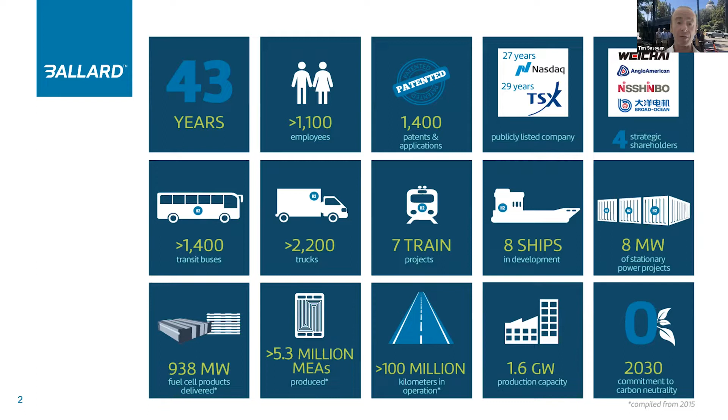The proton will migrate its way across the membrane, and the electron will go through your electrical circuit. They meet up on the other side with oxygen from the air, create water, and the whole process creates heat as well. We call that a unit cell. So you're creating heat and electricity from reacting hydrogen with oxygen and getting water as a byproduct.

There's what it looks like incarnated. At Ballard, we use carbon plates. Some people use metal plates, but they will look about the same. A plate on each side and a membrane in the middle. That membrane has the magic bits like the platinum catalyst, gas diffusion layers, seals, things like that.

That cell will make about 1 volt, and we'll stack those up to get the voltage we want, much the same way you would do with battery cells. You add up battery cells to get the voltage you want, and then you parallel those things to get the power you want. In the case of fuel cells, we parallel up fuel cell stacks.

We put them into a module. This is our FC Move module shown here. And in that module will be care and feeding of that stack, like the compressor to blow in and humidify that air and recirculate the hydrogen, and then monitoring and cooling as well. And that is the box we make, and that's the box that goes into your vehicle, in the engine bay, in the place where an engine would have gone.

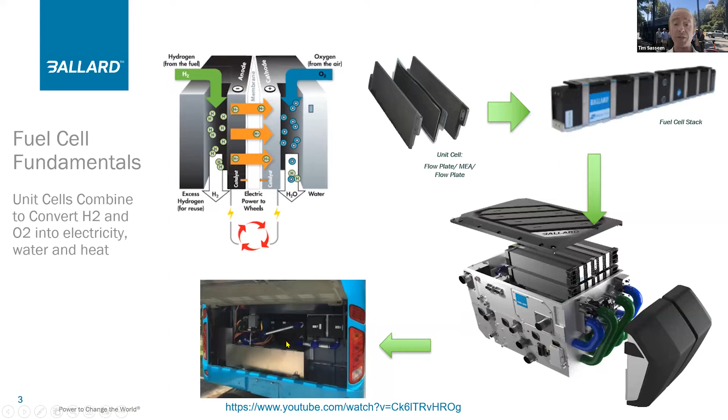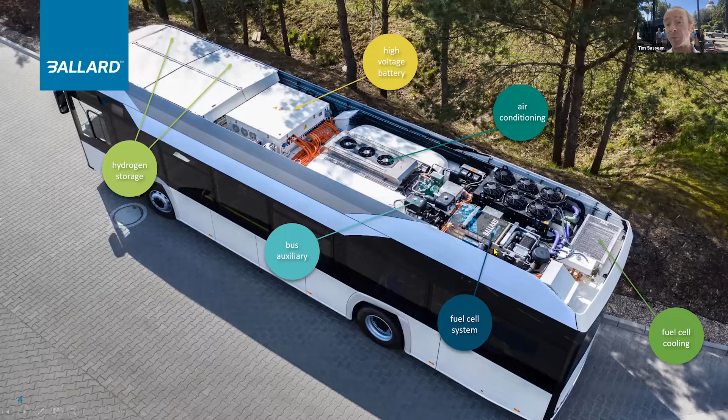This is an electric bus, but you take out most of the batteries and you put in a fuel cell and fuel storage.

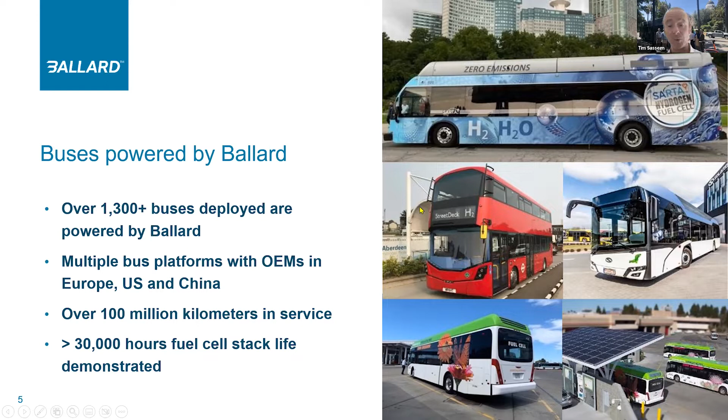We've got over 1,300 buses on the road now, powered by Ballard, and lots of miles and kilometers behind us. Buses with demonstrated over 30,000 hours of fuel cell stack life. And not just ours, some of the older buses that AC Transit has been running have gotten over 30,000 hours as well. It really shows that the technology is capable of lifetimes that are enjoyed by present combustion engines.

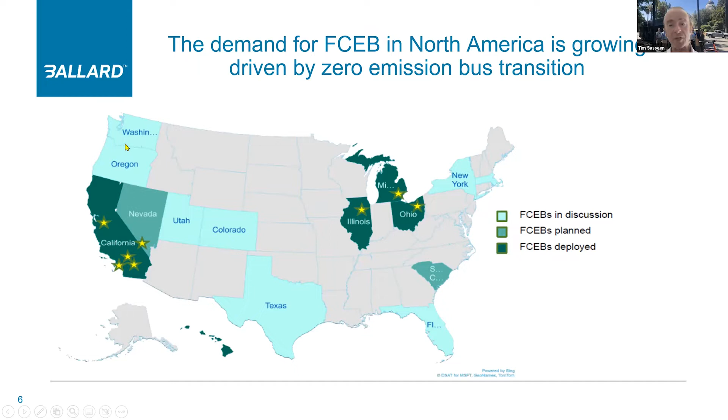Lots of interest in Florida and Texas, and also in Washington and Oregon. This is not a red state, blue state thing. This is really decarbonization, electrification across the US for whatever means is most appropriate for that region. And that's one of the magic qualities of hydrogen.

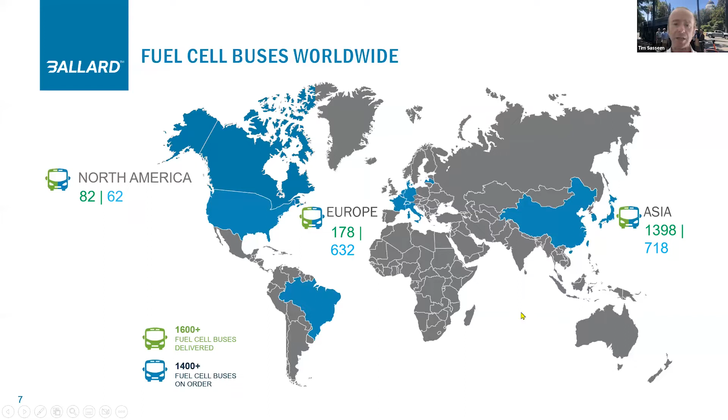And in Europe, we're exceeding this. We're probably over 200 now. I think we're just at 200. Big orders such as Birmingham with 100 buses, Cologne for over 100 buses, and then Asia, lots of activity over there as well. Costs have come down a lot.

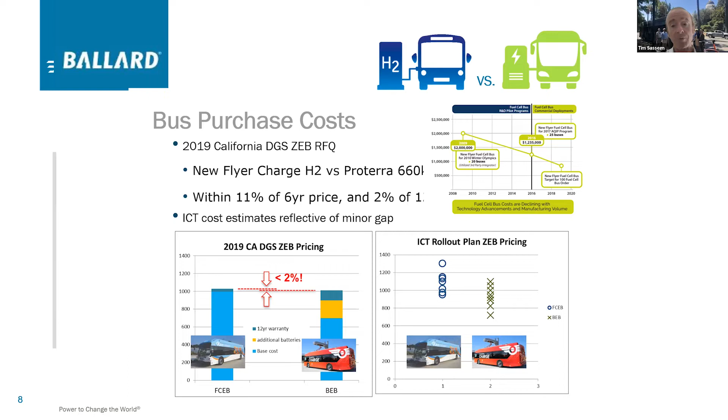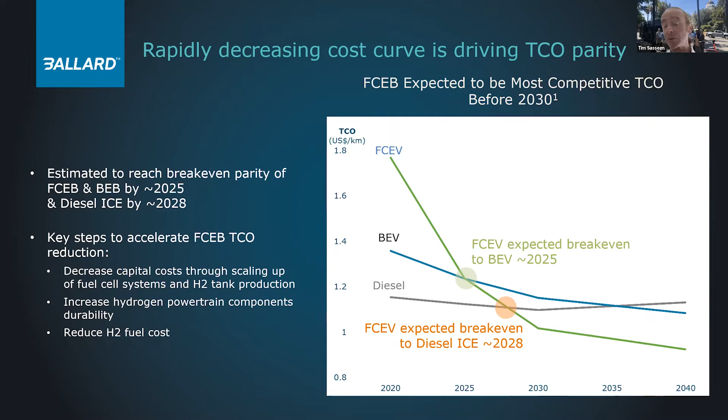We're anticipating 70% cost out of the fuel cell modules by the end of this decade, and we've got a lot of good reasons to believe in that. In fact, a lot of people are looking at total cost of ownership becoming superior for fuel cell electric vehicles over diesels even before the end of the decade. This is looking at studies from McKinsey and Deloitte and others. Mostly this is through the cheapness of the powertrain, which doesn't have that many components. Once it's in mass production, it should be quite cheap, and we're anticipating reduced fuel costs. Service costs have come way down as well.

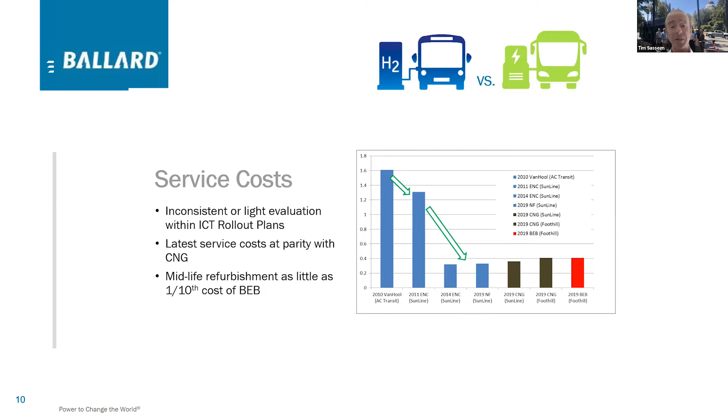There's some great reports to look at there. We're really showing comparable service costs to compressed natural gas buses, and that's with limited deployment and limited technicians out there. So we expect a lot of advancement there as well as we train more and more people to become proficient. This is from AC Transit's second study.

Check out their third study too, also very interesting. They have 5 buses of 5 different technologies that they're comparing, taking data on cost per mile. The fuel cell buses now, these are 5 New Flyers, have very comparable operating costs - in fact in some ways superior to what they're seeing with diesel and diesel hybrid, and close to what battery is seeing as well, with the advantage of very rapid fuel times. They're expanding their fueling facilities there and seeing these fills in under 10 minutes, well under 10 minutes, which is a huge operational advantage.

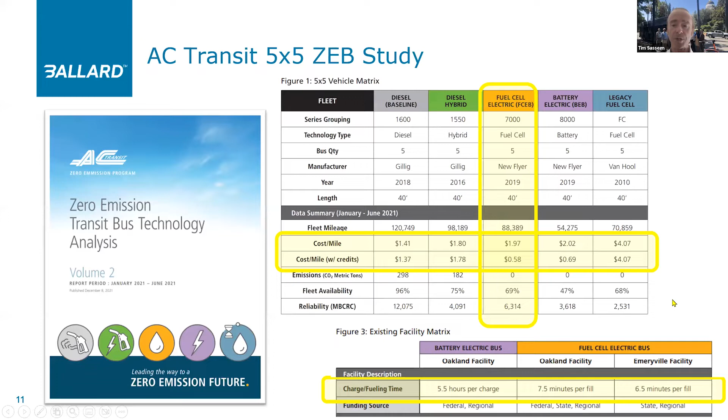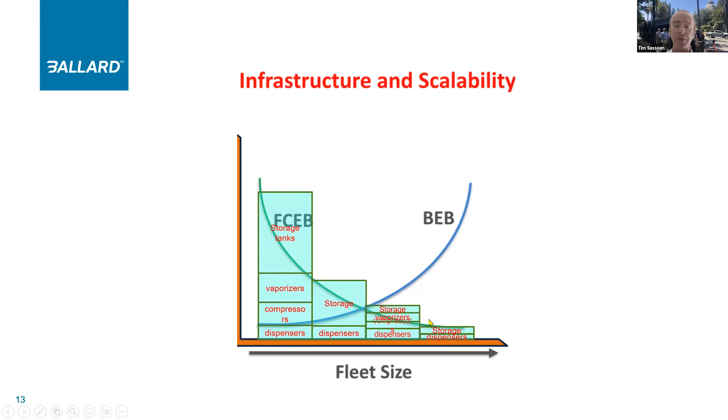We see as fleet size goes up for battery electric buses, you go more and more into your grid, into your public utilities infrastructure, and costs go to transformers, feeder upgrades, even substation upgrades as you get over 100 buses in a depot. On the fuel cell side, you actually have decreasing marginal costs as you add buses on. The components are quite oversized for small fleets, but as you get larger and larger fleets, you can add in buses for smaller and smaller costs. So as you have very large agencies, you'll see this curve really coming to fruition. We've had this notionally for a while, but from feasibility studies and recent installations, it really bears looking at.

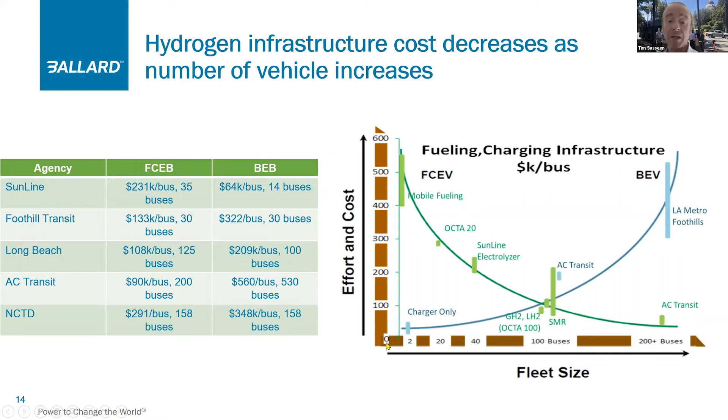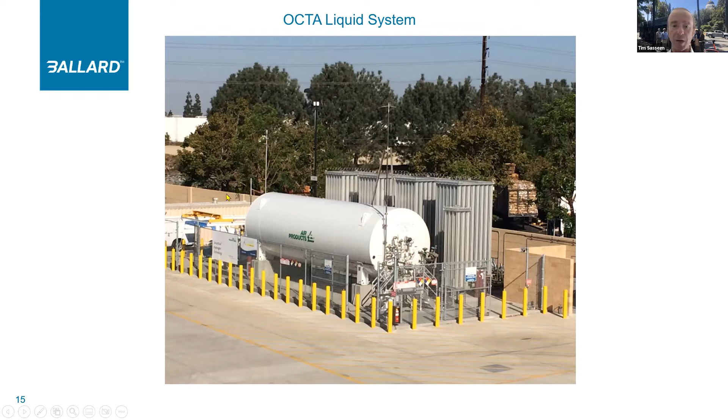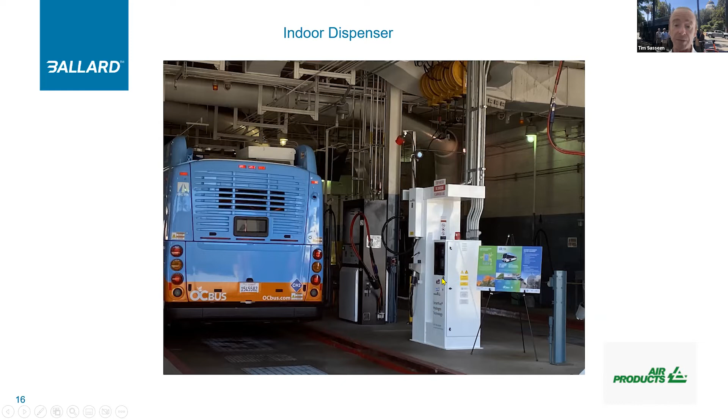Infrastructure costs are a major reason to look at hydrogen and fuel cells. This is what a liquid fueling station looks like, at Orange County. They have about, I want to say 4,500 kilograms of liquid hydrogen here, and these are vaporizers in back. This facility, all contained within the bollards you see here, is capable of fueling 50 buses. They have 10 buses on that right now. Dispensers are delightfully uninteresting - they look just like a fueling dispenser, and in fact you can put them right in line with the fueling that you do for diesel or for other buses. That's Orange County's setup.

Regarding safety, there's lots to talk about for safety with hydrogen - we could go on and on. Most people know that it's a flammable gas, but a lot of people don't think about the fact that we deal with flammable materials every day. In fact, one of them that we deal with almost every single day is gasoline. Gasoline is nasty stuff, and when you compare hydrogen to gasoline, you see some real advantages. Not only is hydrogen non-toxic, but it also is very buoyant and very diffuse. When it gets out, it can be contained in how it's released, as shown in the study done by Ford, comparing 2 cars that are intentionally given a fuel leak and an ignition source. The gasoline you see pooling on the floor, creating vapors, engulfing the vehicle in flames, whereas the hydrogen can be contained to a single release point and safely evacuated.

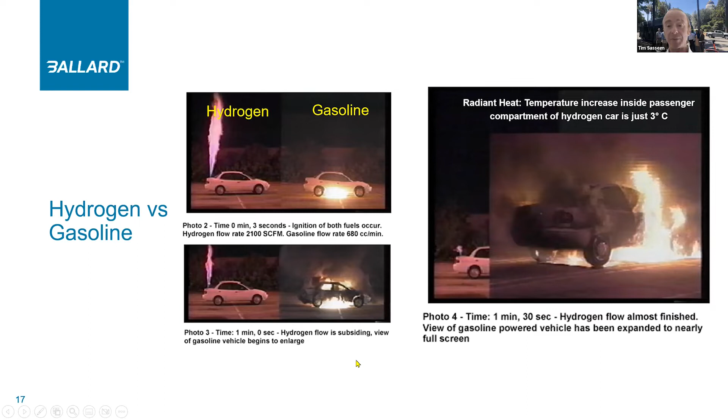Comparing it to gasoline and diesel, there's so many personal safety advantages, particularly regarding toxicity and ingestion. Next time you go to fuel your car, notice how much gasoline you're smelling. If you drive a truck or a diesel, you'll really be familiar with that - all these different criteria pollutants that come out that we're very familiar with. The thing you have to bear in mind with hydrogen is it's flammable, and you need to treat it like a flammable gas, the same as you would with compressed natural gas.

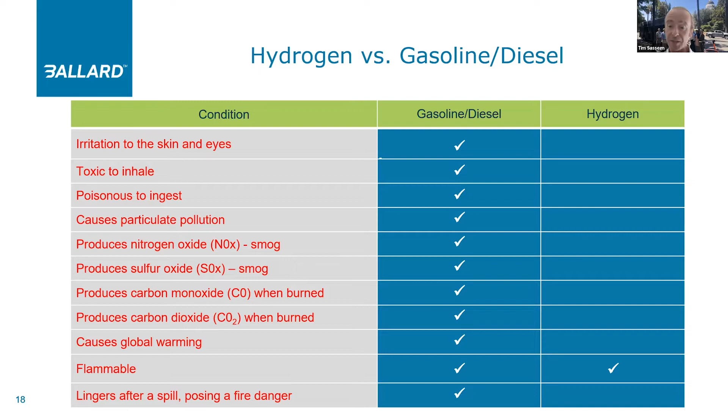And converting facilities, you do essentially the same thing. You make sure you have gas detection sensors, ventilation in the roof, and also explosion-proof electrical fixtures above the roof line.

One other thing worth mentioning is that with hydrogen and fuel cells, you separate out your energy storage into very strong tanks that are literally bulletproof, isolated from where energy is flowing and power is created. If you're going to have a problem, it's going to be where the power conversion happens. With batteries, which we use in our buses too, you pack both energy storage and energy conversion into one spot. That's what battery manufacturers struggle with as they densify this technology. It's a challenge.

Did I get muted? Hopefully I've been talking for the last 15 minutes.

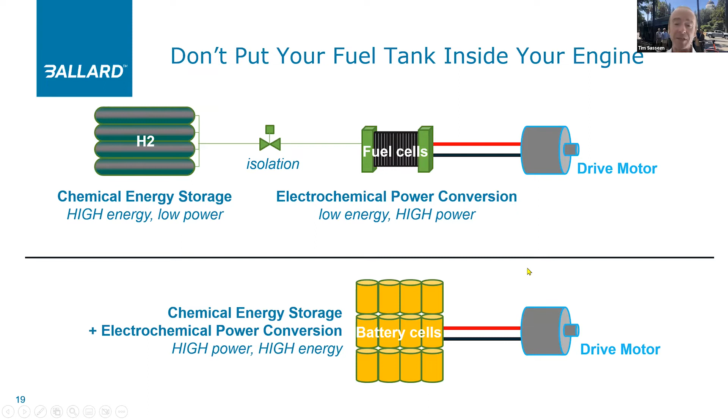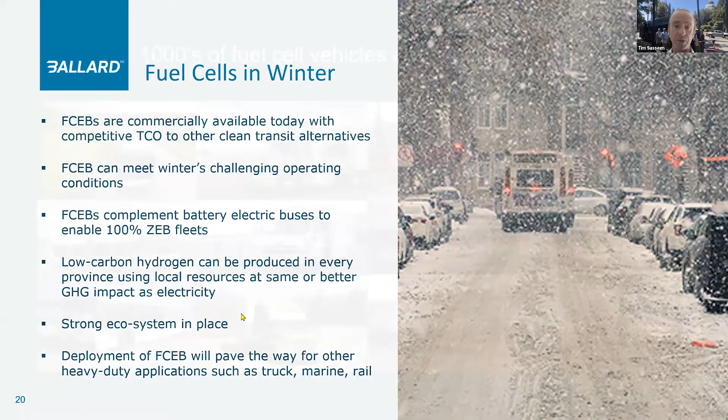Anyways, one advantage you'll see with hydrogen and fuel cells is that separation of energy from power conversion. In winter, it's true that we're around 50 to 60% efficient, but that is also heat that's used to heat the passenger compartment. Not only do we have extra energy on board, but also that heat used for combined heat and power for colder fleets. We haven't seen that so much in California, but certainly in Michigan and Ohio, and in our colder deployments in Europe as well.

We're beyond buses, we're in trucks and trains and rail trucks. We've got a whole bunch of urban delivery trucks. We've done 2 years at the Port of Long Beach with Class 8. We've got a giant mining truck now getting deployed in South Africa. Lots of interest from the mining industry. We've got a couple of yard trucks, these yard dogs, out at the Port of LA at TraPac, and 4 UPS trucks coming to West Sacramento soon. Some very big Class 8 trucks up in Alberta.

Lots of activity in trucks. We're doing yard trucks, Class 6 trucks with Hexagon Purus, as well as Class 8. Huge amounts of activity in trucks. Again, the same story - we're seeing the technology have the capability of beating not only battery, but also diesel technology in the very near future.

Trains, we have a train operating in China. We've got some getting on the rails in Europe and UK. We've got a project with CP Rail, and it's gotten a lot of attention up in Canada. We have a switching locomotive we're working on in California with Sierra Northern Railway. There are people working on a very interesting commuter train in San Bernardino. I'm sure we'll hear about that today. That's very exciting - Stadler's providing the train for that.

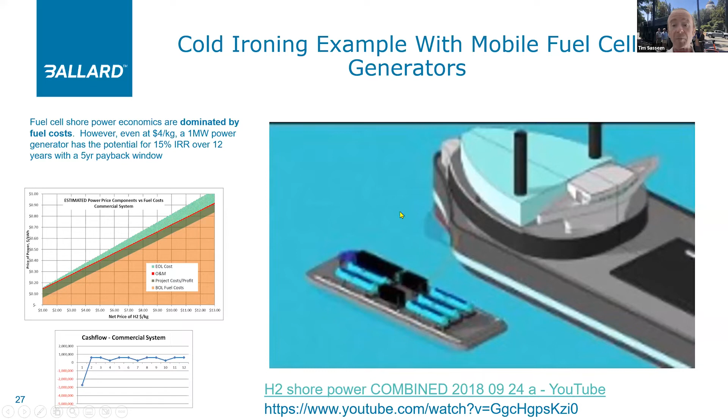Lots of interest in trains, lots of questions around fuel, which is common to marine. You have a lot of fuel to hold on board. People are looking at liquid or ammonia or methanol. Watch that sector, lots of activity there. We're involved in about 6 projects in Europe and a large tugboat design study here in California. And we're looking at cold ironing - applications of stationary power, such as providing stationary power for ships at dock, is one of the areas that's already economically viable. I got a cool video here, but I'm taking up too much time, so I'll keep moving forward.

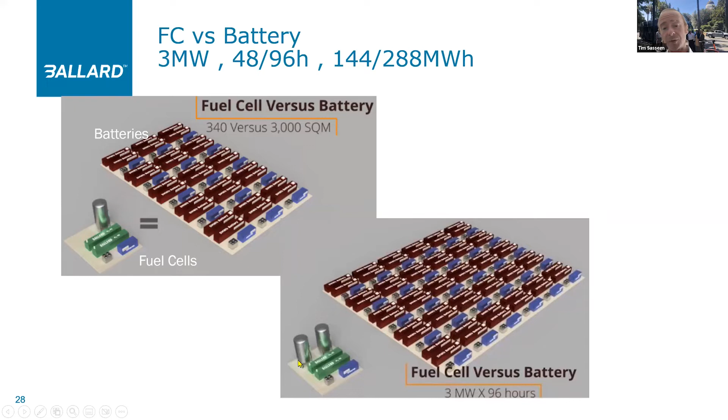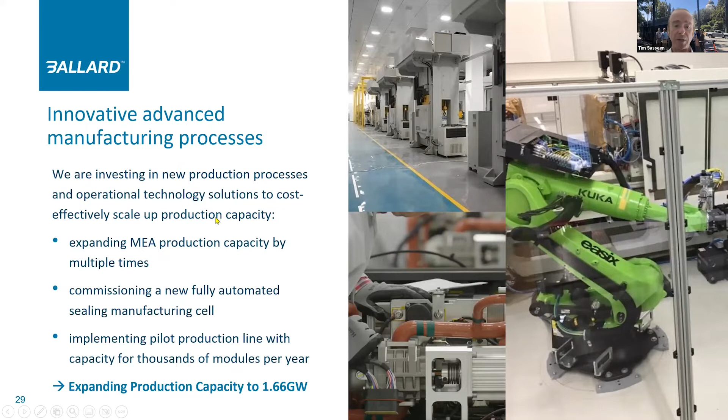Stationary power - this is looking at the comparison of fuel cell power versus battery power for a data center, for either 2 or 4 days, or 2 to 4 days. As you double the amount of time you need, for fuel cells you add an extra tank, whereas with batteries you add a lot of real estate. We're bringing our cost out from advanced manufacturing, a lot of what batteries have already done with continuous manufacturing. This is going to expand our production capability and drop our costs massively.

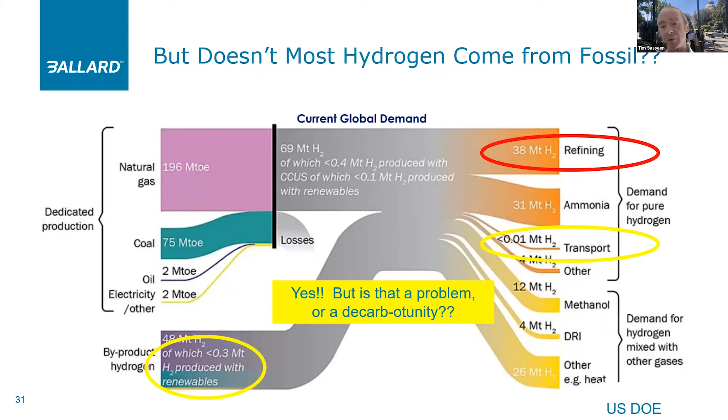When we talk about the fuel itself, you'll hear more about this later - you can choose between gas and liquid. One thing to bear in mind that critics of hydrogen say is that most hydrogen is produced from natural gas and fossil sources. That's true, but most of it is not used for transportation - only a very small amount is. More than that is made by zero emission hydrogen. Most of it's used for refining. So this actually is an opportunity, which hopefully will get hydrogen hub activities in.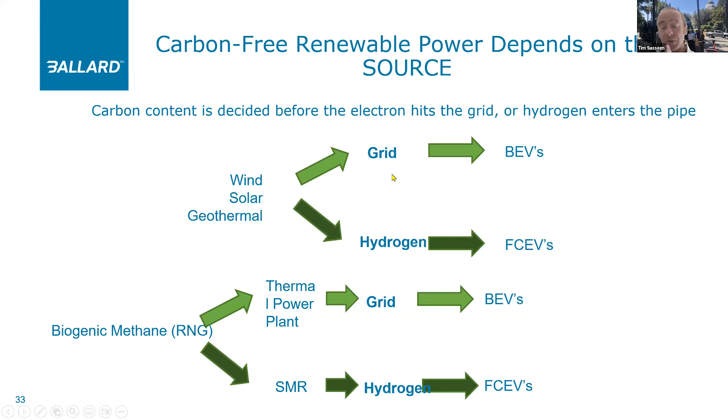Bear in mind with electricity, it's the same case - not all electricity is totally green, it depends on your source. However that gets to you is the same for grid or hydrogen - it matters where that carbon started. Once it gets to your vehicle, you're zero emissions. There are schemes for using that refined hydrogen to instead use zero emission hydrogen, which can then be repurposed for trucks. That helps that economic transition.

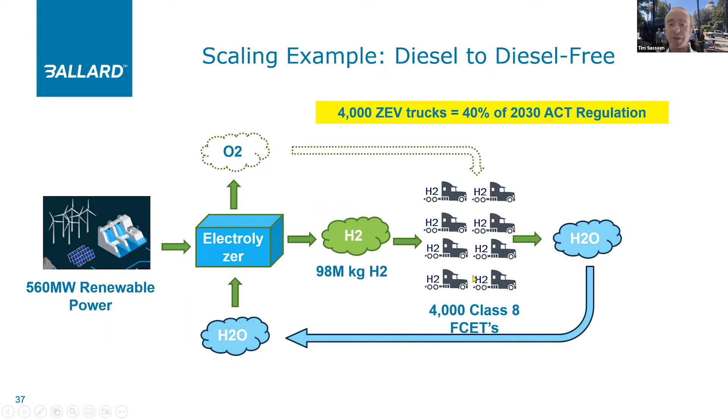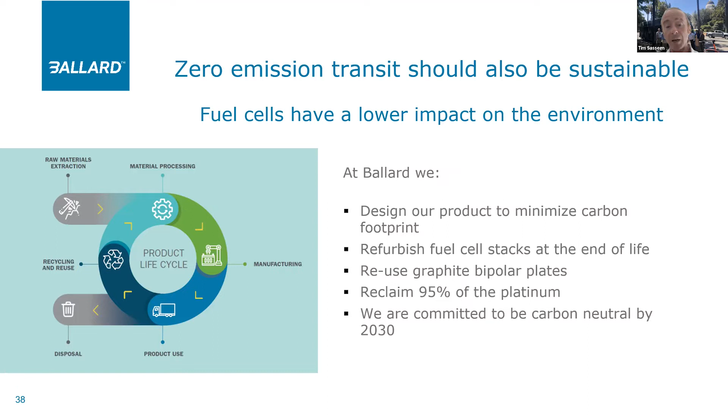Bear in mind that recycling and lifetime emissions are important - how much embedded energy is in this technology. At Ballard and in the fuel cell industry, we recover that platinum. We get more than 95% of the platinum recovered.

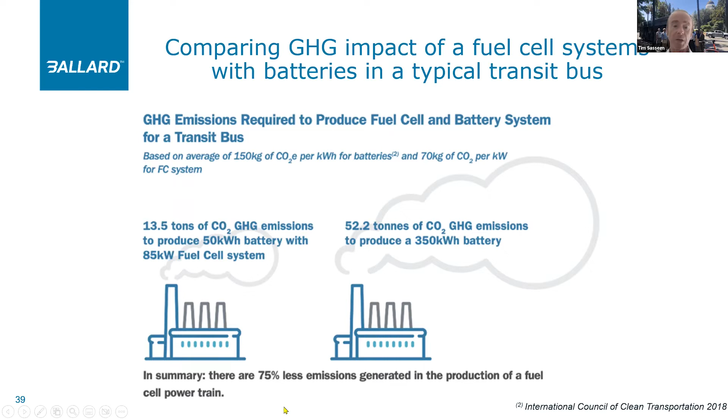When we compare embedded energy between two different buses, we find that the fuel cell bus has about a third or a quarter of the embedded energy in power storage and generation devices compared to a battery bus. This is our latest generation of fuel cell modules, doing big cost reduction.

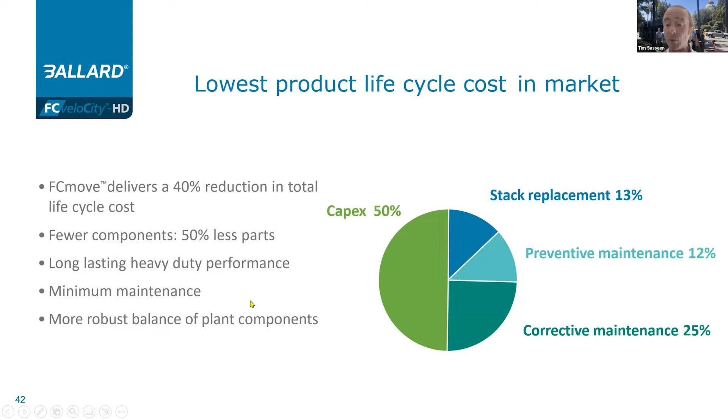We're also working on low cost midlife replacement. You find real advantages there, and hydrogen hubs bring low cost hydrogen. The DOE wants to see $1 per kilogram production costs. Sale costs will be a little higher than that by the end of the decade.

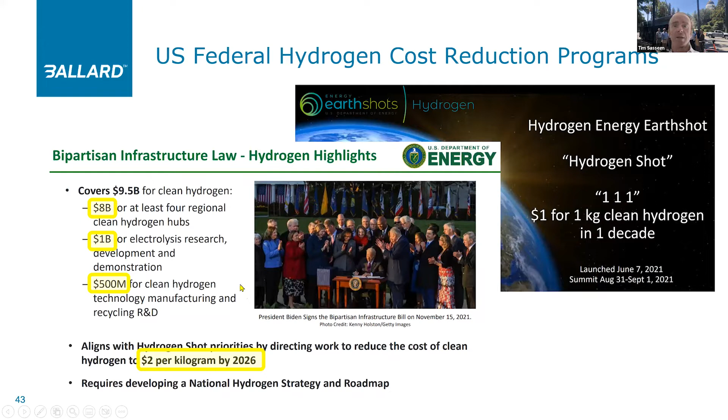We're waiting for that federal grant to come out with hydrogen hubs - over $9.5 billion that the Fed is investing - looking to get $2 per kilogram hydrogen by 2026. That's the big picture. Thank you for your attention.

Thank you, Tim. That was quite the presentation - lots of information. I don't know if there's any burning questions right now, or we can leave it to the end for our discussion if anyone has anything. If not, I will move on to our next poll question.

It was just asking if it's safe or not, and you've already answered that for us - it's as safe as any other fuel that's out there. You have to treat it with caution, as with any energy source. We need to think proactively and integratively about how we bring hydrogen into our communities, making sure the infrastructure and network is built out so it can be deployed across modes. That's our ultimate goal. One thing another expert mentioned is the importance of these larger public infrastructure projects and what that means for the individual consumer down the line, as it becomes more integrated into our communities.

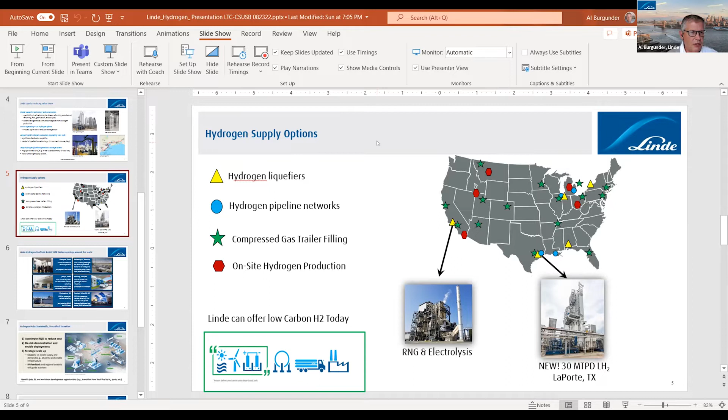Globally, Linde is supporting the conversion of vehicles, mobility markets, to hydrogen. We are working around the world in China, Germany, Korea, and Malaysia. We have facilities, we have technology, and we're supplying molecules to a variety of different fueling stations in California, and also involved in Birmingham, UK. So we're heavily involved in this space on a global basis.

Tim had touched on the hydrogen hubs. This is an infrastructure funding program from the Department of Energy. It was put into law last year, and everybody is working to develop hydrogen hubs across the country. This is a wonderful opportunity to develop a supply solution that will serve a variety of different users. I talk to people about the fact that a hydrogen hub is similar to a shopping mall. You have a couple big players that you'll be supplying, but then you're going to have a whole bunch of other smaller shops, smaller organizations, transit agencies, automobile suppliers, and trucking companies, and so forth, that you'll be supplying with this hydrogen hub.

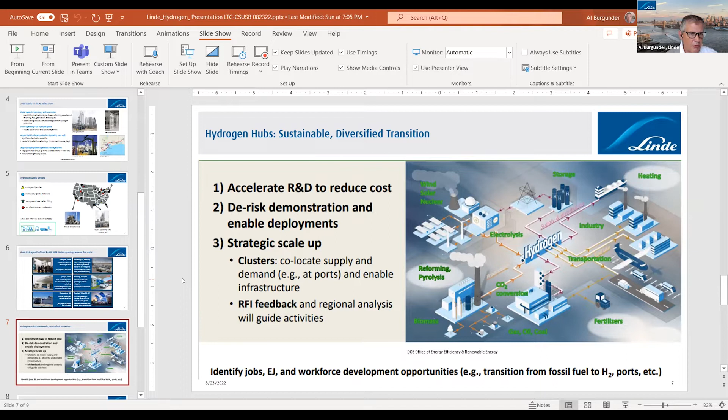So this is a process that's underway. Proposals are probably going to go into the DOE beginning in the third or fourth quarter, probably the fourth quarter of this year, and funding will probably start next year. Thank you.

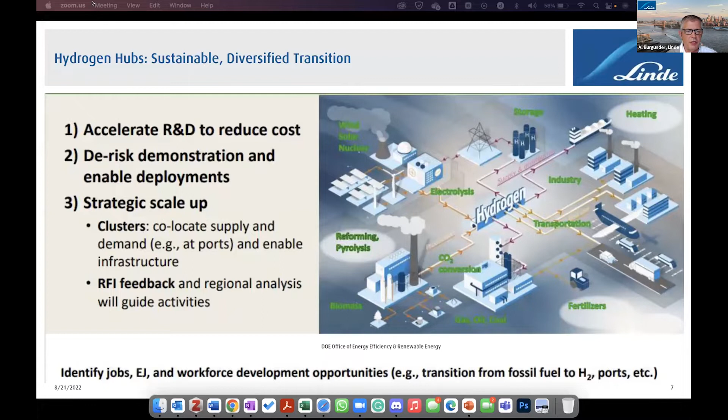So that's underway. The other thing I want to highlight here, and everybody has heard probably a good deal about, is that President Biden has recently passed the Inflation Reduction Act. That is going to be another funding source that helps reduce the cost of hydrogen and infrastructure that's being deployed across the United States. So the combination of the infrastructure bill and the Inflation Reduction Act, which is commonly referred to as a production tax credit, are two ways that are really going to help meet the goals that the DOE has set out in terms of the $2 per kilogram that Tim had presented earlier.

Linde has been involved in this space for quite a long time. In this slide, you can see our value chain. We're heavily involved in production, using a variety of different sources to produce hydrogen molecules. We distribute the product in a variety of ways, whether it's liquid hydrogen, compressed gas hydrogen, or pipelines. Once it's at the use point - and Tim had presented a liquid hydrogen tank in one of his slides - we have pumping technology to get those molecules up to the preferred pressure that the vehicle manufacturer wants on board, whether it's 350 bar or 700 bar. So we have that technology to do that.

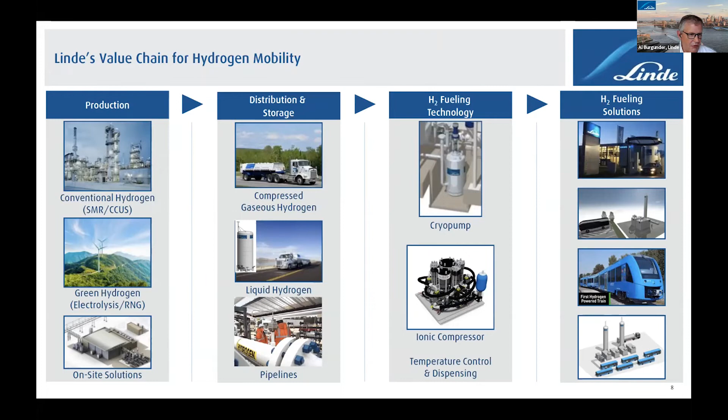So this one: how many colors of hydrogen are there? Simple one, it seems. So as we see, 57% said many.

23% said 3, and then we had 13% on 1 and 7% on 2.

Matt, I hope you're going to be able to help us further in understanding these next pieces of information around the hydrogen world.

Great, thanks, Kimberly. All right. Good morning, everyone. My name is Matt Gregori. I'm a technology development manager with SoCalGas's Research Development and Demonstration Team, or RD&D. Very excited to be here.

I will start things off coming off of that poll. Maybe this is a controversial stance to take, but I do not support or believe in the hydrogen rainbow. I think it's confusing, it covers up a lot of the details that go into hydrogen, it creates biases, and there are too many colors. There's so many ways to make hydrogen that every day I feel like there's a new one - there's chartreuse, and then there's eggplant and mauve. It's just too confusing. So I support the California Air Resources Board and their use of carbon intensity when we try to think about what's good hydrogen, what's bad hydrogen. There will be plenty of opportunity at the end of the session for you to fight me on that, and I look forward to it.

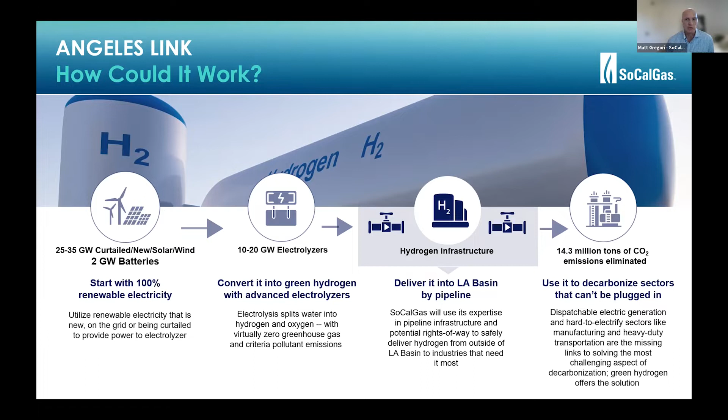We could then deliver that hydrogen via pipeline from areas outside of LA into the LA basin and deliver it to the industries and customers that need it the most. We could use hydrogen to decarbonize hard-to-electrify sectors such as electricity generation, heavy duty transport, and industrial processes. We think that Angeles Link has the potential to displace 3 million gallons of diesel fuel per day in LA, and that would reduce about 25,000 tons of NOx per year. This is a big project and it's still in the early stages of development, but it's just one of the ways that SoCalGas is working to achieve net zero greenhouse gas emissions by 2045.

Now I'd like to talk a little bit about my program, Research, Development, and Demonstration, or RD&D. SoCalGas RD&D has been working on an array of technologies that could enable larger game-changing projects like Angeles Link. The RD&D program funds researchers to develop new technologies that we think will benefit our customers and all Californians through energy savings, reduced environmental impacts, and improved safety and energy reliability. Our program's divided into 5 research programs that span the entire energy delivery value chain.

Starting off on the supply side, we have low carbon resources, which is focused on decarbonizing the gas supply - looking at projects around producing hydrogen. As I mentioned, there are many different pathways for producing hydrogen, and we're looking at many of them, including electrolysis, steam methane reforming with carbon capture, distributed steam methane reforming, and some more advanced technologies like methane pyrolysis, which I'm really excited about.

The gas operations program supports innovation in pipeline transportation and storage operations. We recently held a webinar talking about a lot of the work in the gas operations program to enable the pipeline to accept blends of hydrogen. And then downstream of the gas system, we have my team, called Customer Solutions. We oversee technologies on clean power generation, customer end use applications, and clean transportation.

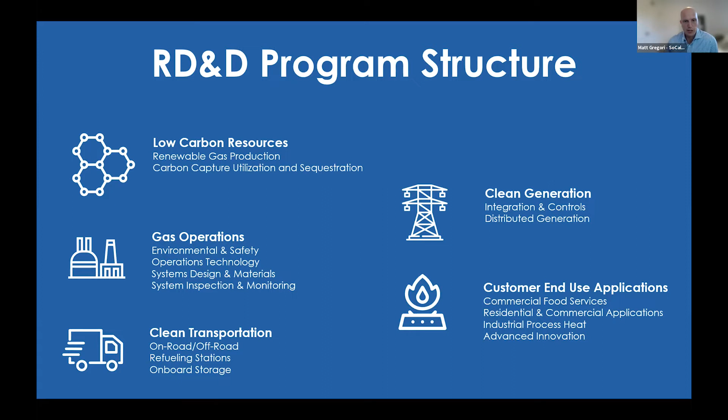In 2021, RD&D spent $18 million on research to advance new technologies to help California meet its ambitious environmental goals. We achieved an average leverage ratio of 5.2x, meaning for every dollar we provided to a research project, the project received $5.20 in funding from other agencies, utilities, or funding programs. And then this is the amazing RD&D team, staffed with experts in science, engineering, industrial process technology, and environmental policy.

These are just a few of the universities, public agencies, research consortia, and national labs that RD&D has worked with in the past. We welcome the opportunity to collaborate with new research partners, especially those from diverse academic populations at universities and colleges that serve first-generation students, and students from environmental and social justice communities.

So that was the primer on the RD&D program and SoCalGas, our interest in hydrogen. I'll talk a little bit specifically about the Clean Transportation RD&D program. This program focuses on minimizing the environmental impacts related to the transportation sector, particularly through the integration of hydrogen and renewable natural gas. In 2021, the Clean Transportation Program supported 29 research projects with technical guidance and about $2.8 million in funding.

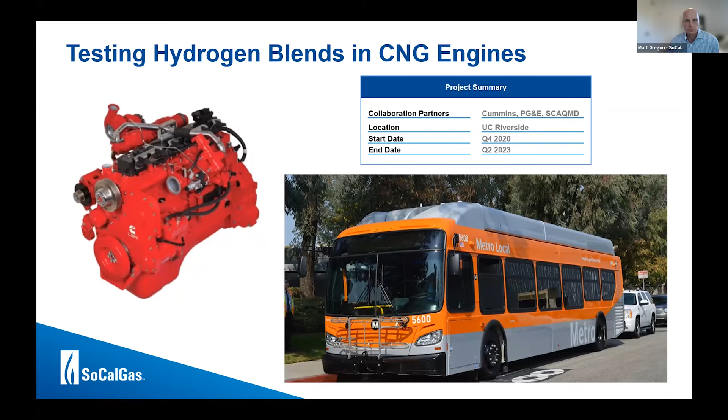Yard trucks are the single largest source of emissions in all classifications of cargo handling equipment. The project is intended to demonstrate to port terminal operators that fuel cell powered zero emission yard trucks is a safe, reliable, and operationally preferable solution to meet the port's Clean Air Action Plan. The trucks are supported by HTEC's hydrogen fueling system, which provides fuel in a similar manner as diesel is currently provided.

I will say the preliminary results suggest that this first generation of truck is extremely overbuilt. So we're looking forward to the second gen, which will be much cheaper because it needs less fuel cell, less battery capacity. It's just over-engineered at this point. That's one of the major cost savings you'll see when you talk about learning curve effects, or how do we get the cost of these vehicles down - as we learn more about the vehicles, we can design them more efficiently.

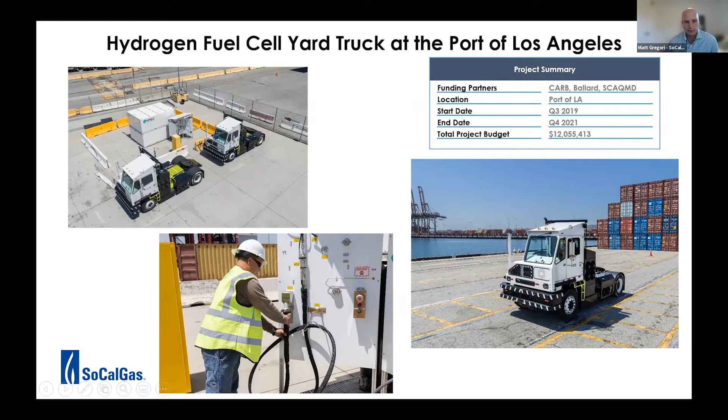We recently announced that we're working with Ford Motor Company on a demonstration project to reduce commercial fleet emissions by developing an F550 Super Duty hydrogen fuel cell electric truck. This collaboration is part of the U.S. Department of Energy's Super Truck 3 program, which aims to reduce emissions in medium and heavy duty trucks. This is another step towards our Aspire 2045 sustainability goals, which set the standard of replacing 50% of our over-the-road fleet with clean fuel vehicles by 2025, and then operating a 100% zero emission fleet by 2035.

In this project, Ford will provide SoCalGas with an F550 Super Duty truck fitted - I think it's going to be a crane truck - so it's fitted with all the equipment that our standard workers would use within the fleet, within their day-to-day operations. But it will be operating on hydrogen fuel cell electric technology.

SoCalGas was chosen to evaluate the prototype because of the rigorous demands of utility work and because of our climate and our geographical location. So this truck will actually be out in the field, on and off road, helping to make repairs and install new equipment. We'll also likely install a temporary hydrogen refueling station at our Bakersfield facility, and we're looking to deploy this truck in 2025.

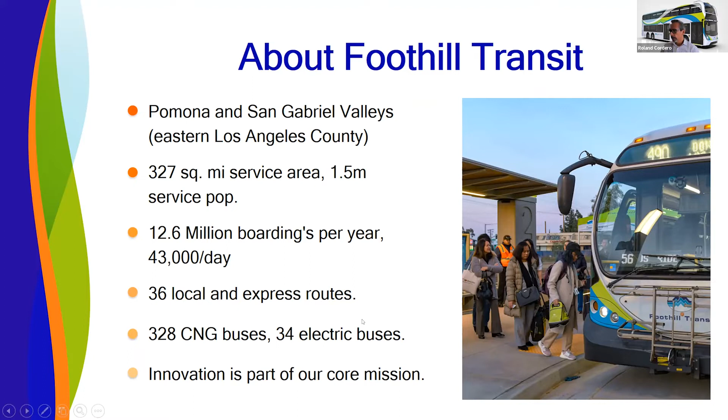Our zero emissions program began in 2010 with 3 short-range en-route charge Proterra 35-foot buses. We added more buses in 2014, 16, 17, and 18. Our latest addition were 2 double-deck battery electric buses manufactured by Alexander Dennis.

In California, the California Air Resources Board issued their Innovative Clean Transit regulation in October 2019, requiring transit agencies to transition to a 100% zero emission fleet by 2040. The transition starts in phases beginning in 2023, which is next year. 25% of bus purchases should be zero emissions, going up to 50% by 2026 and 100% by 2029.

Since our first order of Proterra buses had only a range of 35 miles, it was necessary to install en-route chargers at the Pomona Transit Center, located at the middle of route line 291. Line 291 is 16.1 miles long round trip, and the line was fully electrified in 2014 with the addition of 12 35-foot short-range fast charge battery electric buses manufactured by Proterra.

In 2017, we received our first fleet of Proterra extended range buses, which supposedly had a nominal range of 251 miles on a single charge. Our actual findings operating the buses in service showed only an average of about 150, 159 miles. In order to operate these buses on line 280, which we had planned to electrify, we needed a way to extend their range.

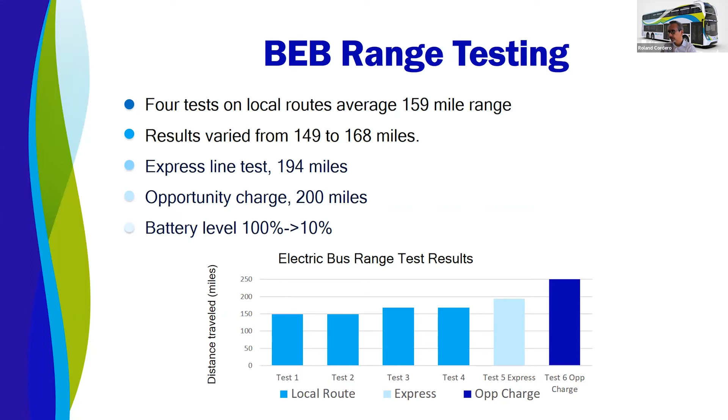What we came up with was to install a range extender. We built 2 overhead chargers at the Azusa Intermodal Transit Center, located at the beginning of line 280. Line 280 is a 22-mile round trip utilizing 14 extended range buses. We added dwell time to enable the buses to trickle charge, providing the additional battery energy to meet the line's longer bus blocks.

In 2018, we completed our first in-depot charging station at our Arcadia bus yard. This project was in partnership with Southern California Edison and Proterra. Foothill Transit was one of 4 transit agencies selected by Southern California Edison for their Charge Ready Transport pilot program. Edison designed, built, and permitted the infrastructure connection from the transformer to the bus yard, while Proterra installed the chargers and overhead structure. As part of the Charge Ready Transport program, Edison gave Foothill Transit a 50% rebate on the chargers, totaling about $250,000.

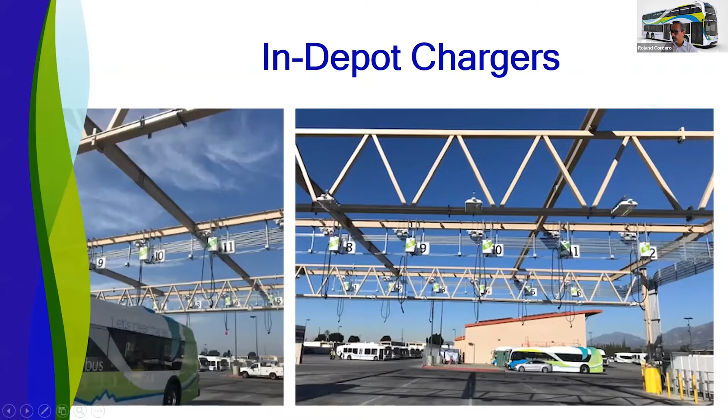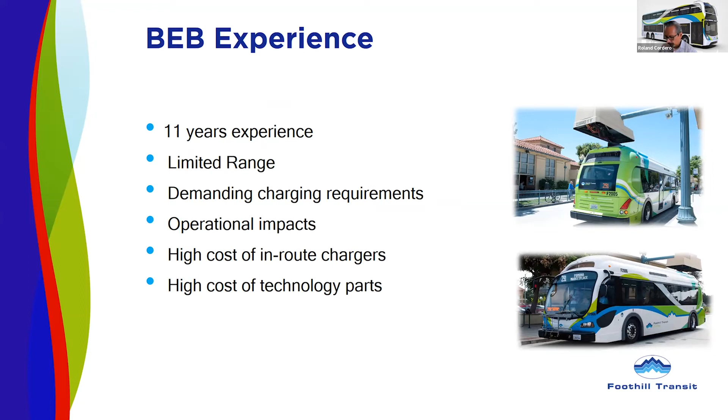Operating battery electric buses for the last 11-12 years shows that battery electric buses have the proverbial range anxiety due to their limited range. Charging buses takes hours in depot, and dispatchers must be fully aware of which buses are fully charged and ready for deployment. In-route charging infrastructure costs are expensive, costing up to about $700,000 per unit. Maintaining battery electric buses is inexpensive while they're under warranty period. However, maintenance costs can be very costly when technology-related parts fail past the warranty period, such as inverters at around $12,000 a piece.

In 2018, we hired Burns & McDonnell to prepare a study for a plan to transition to 100% battery electric bus by 2030. The report was issued in 2019 and indicated that it would cost Foothill Transit about $120 million to transition to a 100% battery electric fleet.

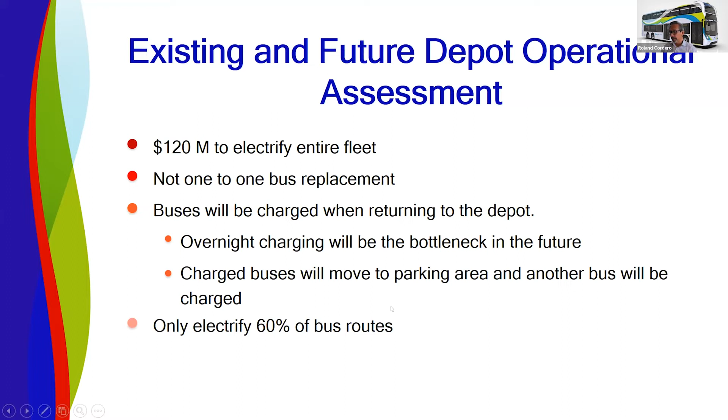The battery electric buses are a 1.5 to 1 replacement and require us to increase our fleet size to operate our current service. Consultants recommended that we only charge the buses during off-peak electricity usage to lower overall cost. However, that's not possible since buses have to be repaired, and charging the buses that way would only allow us to electrify 60% of our bus routes.

Over the time it took to do the study, we began to get results from other transit agencies or partners who were using fuel cell technology. We requested Burns & McDonnell to compare fuel cell technology with the battery electric fleet.

Why fuel cell? A range of up to 350 miles on a single fill-up for a fuel cell bus. They operate like your CNG or diesel buses, without the fear of buses running out of charge while en route. The cost to build fueling infrastructure for over 100 buses is about $6.6 million, and scaling the fleet size will only require minimal cost by adding another hydrogen tank. The fueling process takes about 10 minutes to fill each bus versus hours to charge an electric bus.

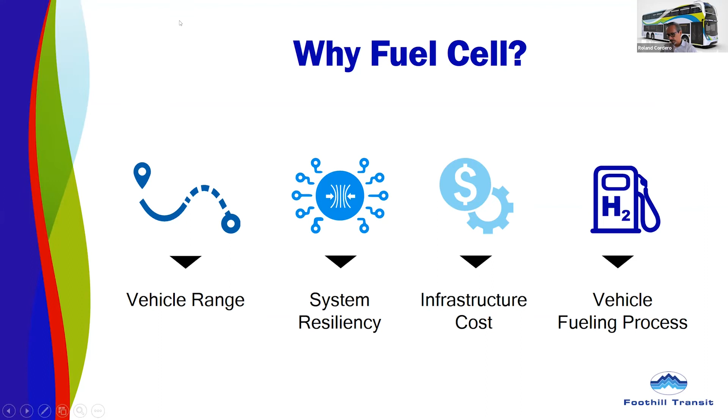California offers several incentive programs to assist in lowering the operating and capital costs of both battery electric and hydrogen buses. Low Carbon Fuel Standards, or LCFS, allow agencies to earn credits from operating zero emissions fleets. Other programs include HVIP, the Hybrid and Zero Emissions Truck and Bus Voucher Incentive Project. There's also VW mitigation funding, which offers up to about $400,000 for fuel cell electric bus purchasing.

In order for us to move forward with our hydrogen fuel cell program, we had several procurements that were required. We had to issue the following procurements to move forward: we purchased our fuel cell buses through the California State Zero Emissions Vehicle Program, and we issued a procurement for the design, build, and installation of fuel cell fueling stations.

In order for us to move forward with maintaining and repairing our fuel cell buses in our maintenance building, we're required to install hydrogen detection systems and upgrade the ventilation. We also entered into a contract for the operations and maintenance of the fuel cell station and provision of liquid hydrogen.

We received our first hydrogen bus last month. Additional buses will be delivered beginning mid-September. We have an order of 33 buses with New Flyer, which is the largest order of hydrogen fuel cell buses in North America.

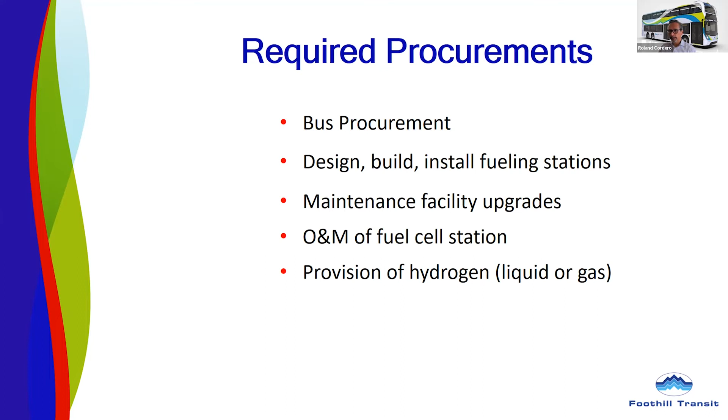Completion of our fueling station is currently under construction and expected to be completed by the end of this year. As for the program timeline, in November we had some supply chain issues, especially with tank delivery. Now it's been extended to December of this year.

That concludes my presentation, and I'd be happy to answer any questions you may have.

Thank you so much, Roland. That was a great transition.

Over to really think about the different technologies that are out there and the decision points that are being made in moving forward on these key issues around new and cleaner fuels. It's one of the questions I put out there in each of our dialogues: really thinking about the role of government within this process, and what needs to be done to help local agencies figure out the best way to move forward with these difficult decisions, and thinking about what is the right choice in these large investments. So thank you for that.

With that, we have time now for discussion and questions. Of course, I always have many questions, but I will open it up first to each of you for any questions to any of our speakers. Well, I'm going to throw it to each of our speakers on this first one.

So, and this might be, I don't know if it's too complex or too professorish, but what really are the first steps for communities to think about the implementation or bringing about hydrogen into the area? And how do you foresee the deployment of hydrogen within, maybe the public or the individual user, as opposed to just the heavy duty vehicle sector or the more industrial sector, or those more industrial operators?